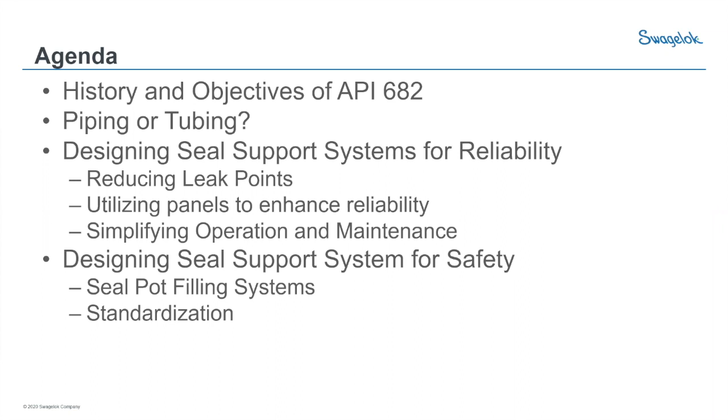Just a little history on API 682. The first edition was in 1994. I want to mention that the nature of these standards is they aren't the leading edge, it's the tried and true. It's everything that's come out and been tested in the field for several years, and then it makes it into that publication after going through the review process.

About every 5 years, with sometimes some delays, they publish a new version of these standards. A good example is the second edition, 2001. Gas seals for pumps were out there for quite some time, as well as dual seals, but they didn't make it into the standard until 2001. So it lags a little behind what some people in the industry are doing, but it's an excellent resource, as it's proven to work in the field, and wherever there are issues, they note that in the standard.

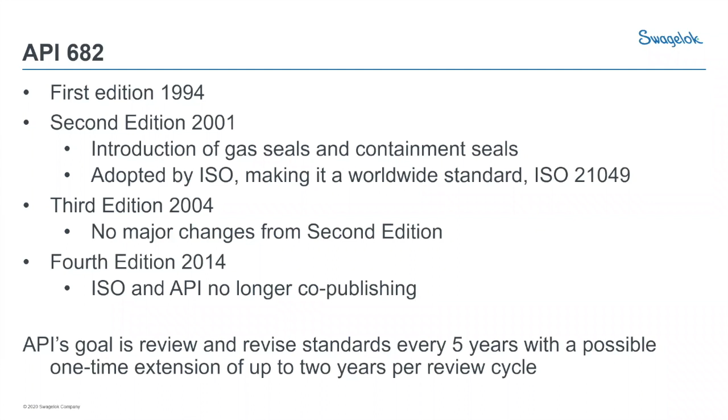The focus of today is the fourth edition of API 682, published in 2014. It's important to first note that it's a standard for sharing best practices, not a code like ASME B31.3. As a designer of systems, it's a great reference, but there are times when you might need to deviate. Throughout the standard, language like 'unless otherwise specified' is very prevalent.

It's really the gold standard. It requires the highest level of quality components, et cetera. So when we have customers in the chemical industry that may have a split between ANSI and API systems, or even chemical plants that are completely ANSI, API 682 is often referenced because it is that gold standard. They might just back down on some of the component requirements because it's not a petroleum service.

The two major sections for seal support systems that I look at are Section 8 and Annex G, so those are the ones I reference the most. Swagelok does not make a mechanical seal, we are not pump manufacturers. There's the EagleBurgmanns of the world, Flowserve, John Crane - those are your seal guys. For questions about seals, continue to work with them.

Where we come into this is being fluid system experts. Swagelok's been designing and building fluid systems for a long time, and over the last 15, 20 years, we've really become quite involved with seal support systems.

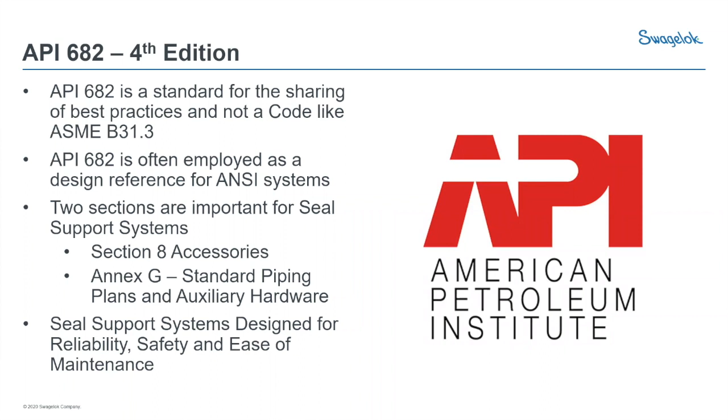So piping or tubing, what do we choose? In the past, for years, piping was the preferred choice. Whenever we look at the standard right now, everything's referred to as a piping plan 53 or piping plan 52.

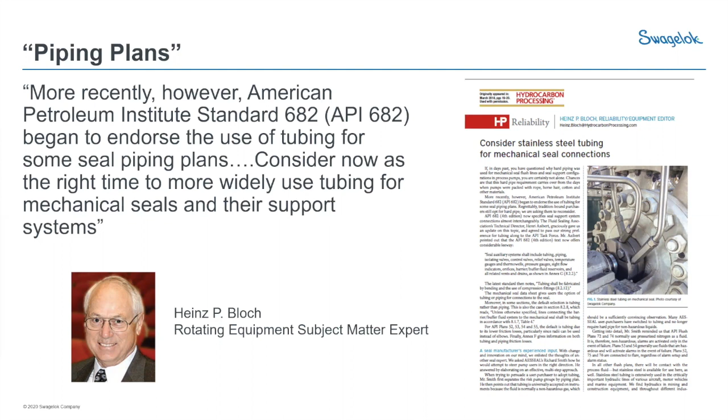I wanted to show an article here from Heinz Bloch, he's basically the Yoda of rotating equipment. He publishes tons of articles in Hydrocarbon Processing. He's an advocate for the use of tubing in these systems, and we've seen that from the major manufacturers of seals and pumps over the last 20 years - tubing has become a much more predominant connection type in these systems, for a variety of reasons that we will discuss.

Typically the pressures are not really a concern—it's really low pressure nitrogen. We also see usage in these systems of tubing above 1 inch, particularly at the OEM level. Companies like Siemens and Dresser-Rand are starting to use tubing above 1 inch up to 2 inch on these systems. But for most of your applications in refining or chemical processing, 1/2 to 1 inch tubing is really going to cover you.

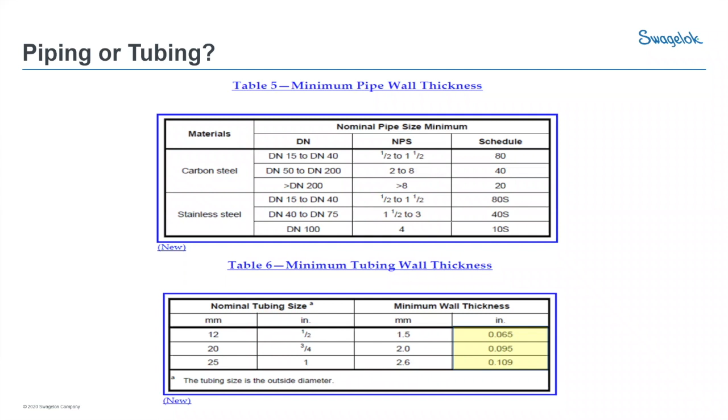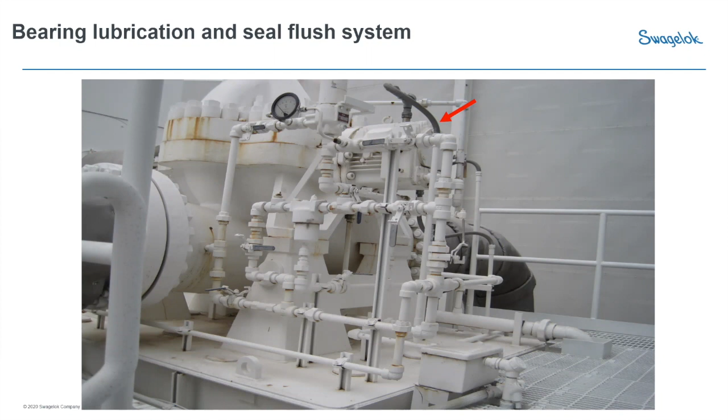One of the other things that was improved, that we worked with the engineering team on, was the vibration issue. These pumps are large and vibrate quite frequently, and the whole pipe system suffered from that. The vibration studies on this pump showed that if you hug the tubing around the center line of the pump, where vibration is lowest, and support it well enough, that whole system now vibrates with the pump instead of sitting off to the side on that pad, separately, like that pipe system.

Overall, the improvements were quite dramatic for the pipeline company, and they've implemented this across the pipeline. Where they were doing maybe 1 or 2 pumps a week, they can now do about 5 or 6 pumps a week when they retrofit these systems and replace them with tubing.

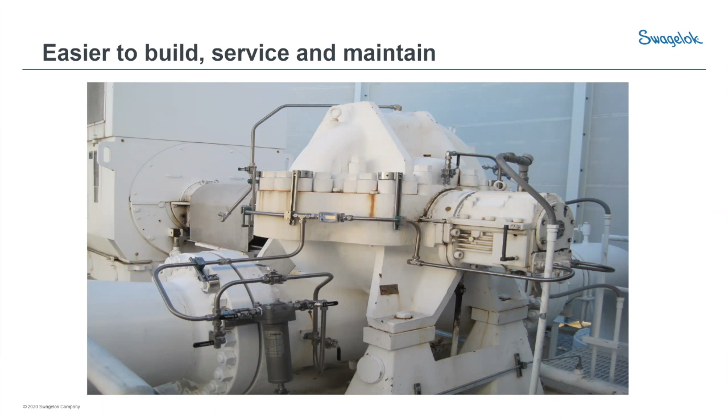I want to make an important note here that, like I said, the standard kind of is a laggard to what people are doing in the field, but they still want to give people pertinent, relevant information on what's being done. What they've done to accommodate that is, wherever something has not been proven to have a 3-year successful life, they note that in the notes beneath the drawing and call it out for each plan. So that's something you should consider when you're designing plans and looking through the book. Not all piping plans are created equal.

For this one, the Plan 12 has not demonstrated a 3-year successful operating life, and that's primarily because there's a strainer in this plan. It can be a reliability concern, because if I'm not doing my preventive maintenance and blowing down that strainer, it can clog, I can lose my flush fluid, and then I've got a seal issue. So it's important to use Annex G to make sure I'm understanding the pros and cons of each installation.

We have customers that will put that strainer in there for a period of time, and if they demonstrate that that strainer is never clogging, it's never getting any grit in it, they remove that component and basically make it a Plan 11 then, just to remove any possibility of an issue.

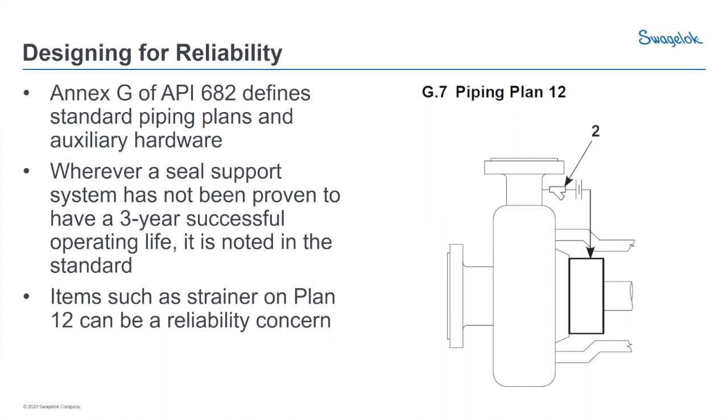One of the big things that all rotating equipment engineers I talked to, I showed you that picture of the pipe system with threads on it, is really trying to get away from threaded connections. And that's throughout the 4th edition of API. There's always mentioning get rid of as many connections as possible, because every single connection on a seal support system is a potential leak point.

However, as I said before, this is a recommendation of best practices. Sometimes you might need to add additional instrumentation. So I think there's a tension for designers when they're looking at seal support systems. They see API and they say, well, this is the way API says I have to do it. But as an owner of this piece of equipment, I think you should also consider there may be times when I need to add something for a period of time to get diagnostic information.

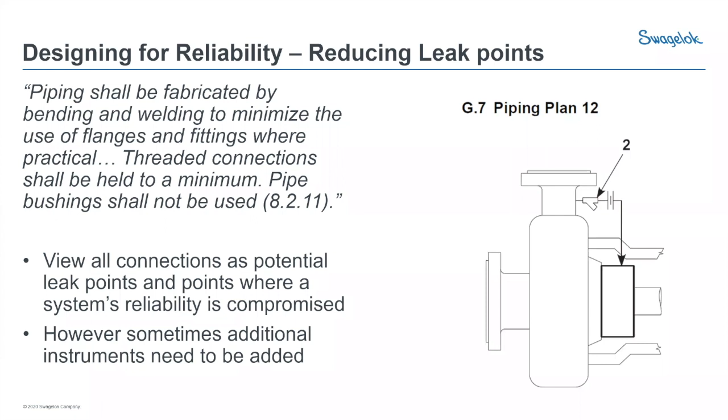So I'll pull up a quick picture here of a modified Plan 12. So I still got my strainer and my orifice in there, but in this instance, now I've added 2 gauges on either side of the strainer, right?

So we've had customers that have had issues with strainers clogging, maybe, and they don't know the frequency. So it's within your purview then to add something like gauges to monitor that strainer and maybe devise a new preventative maintenance schedule after you've had them in for a little bit. It's not that you have to leave those gauges in there forever. Once you come up with a new preventative maintenance schedule and say, okay, that strainer is clogging every 3 months, we're going to PM it every 2 months, you can take the gauges out then and return it to the basic Plan 12.

And I think that's where tubing can give you a little bit of flexibility to easily make those changes and add and remove instrumentation. So I don't look at API as my Bible, but it's a heck of a good place to start and then make informed judgments from there.

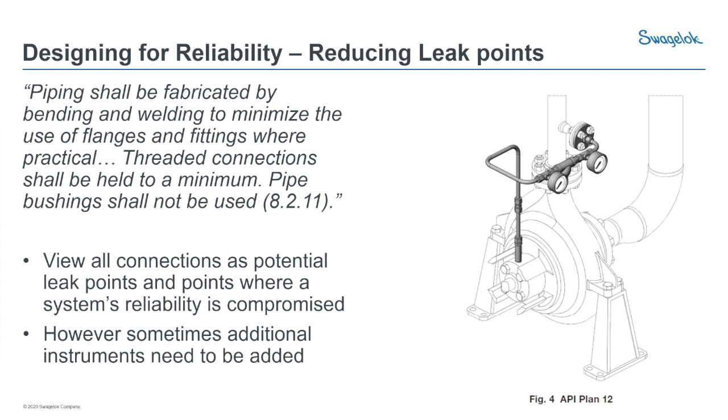So I'm going to give you a couple pictures of installs I see and some of the challenges guys have in rotating equipment. This is a new installation in the fracking fields of southeastern Ohio, where they're fracking and taking natural gas liquids and natural gas out of the ground. So here's a series of pumps, and there's a couple of things I noticed right away.

Here's my orifice plate on a basic Plan 11. It's a Plan 11 with the 52 on there as well. That's the seal pot that you're seeing. Well, they did have some clogging issues on these orifices when they started up the plant. The gas coming out of the field has liquids, it might have some other stuff in it.

But if you can see, as this Plan 11 is oriented, there's not really an easy way for them to add that gauge to figure out if it's clogging - maybe moving that orifice into the middle there and putting gauges on either side of it just to see if they're getting clogging issues, possibly putting a strainer in there for a period of time. Again, I think that's where you can play with the orientation, the components on these things to diagnose problems. Once you've figured it out, revert it back to that Plan 11 and just have the appropriate PM in there.

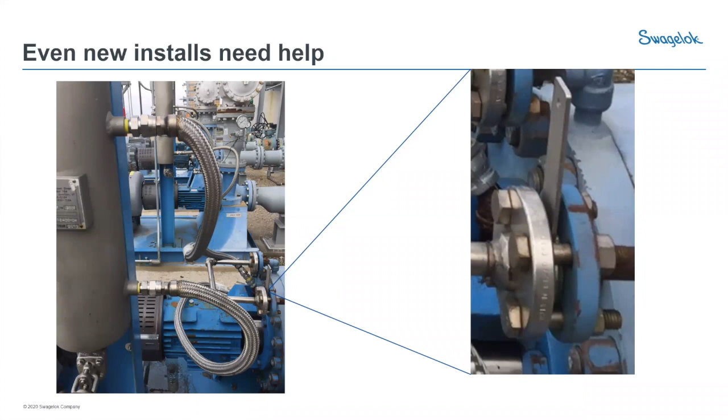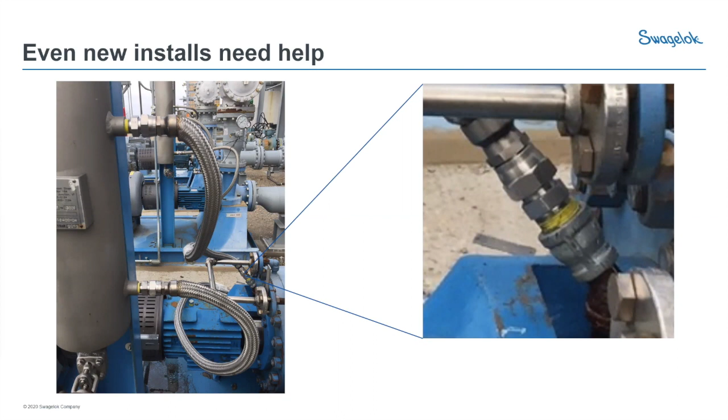Next thing I'm looking at is 1, 2, 3, maybe 4 connections going into my seal there from that Plan 52. Too many leak points. It's too close to the pump. It's just a reliability issue. And so there really isn't a lot of need for us to ever use 3 or 4 fittings to get out of a pump and into the seal pot. It's just something we should not be doing.

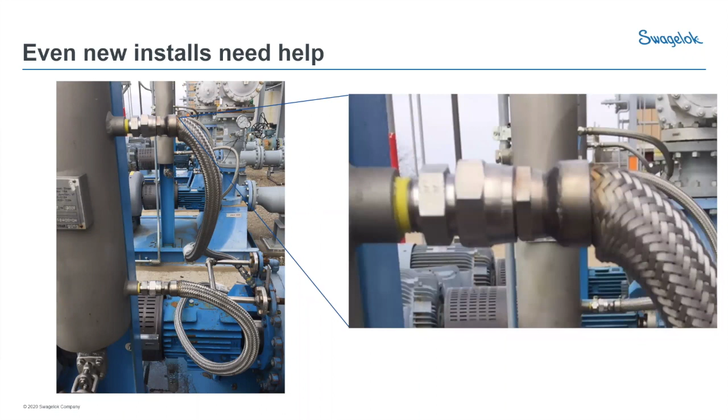And I'm sure the one thing that everybody notices right away, my hose. Hoses really aren't a recommended thing for API service. I would always tell customers - and it's really not even referenced in the standard at all - to always go with tubing wherever possible, because hoses are not permanent installations. They will fail.

I can't tell you when this hose will fail. I can just tell you by looking at it right now, it will fail someday. Maybe it's going to be Christmas Eve or your daughter's birthday. I don't know. Hoses just aren't permanent installations. Let's just not go with something like this.

I won't even comment on the hose laying on top of the pump, or the twisty ties used to hold it up to the gauge in the background, or anything like that. While it might be acceptable for ANSI service, I would never recommend the use of a hose in API service.

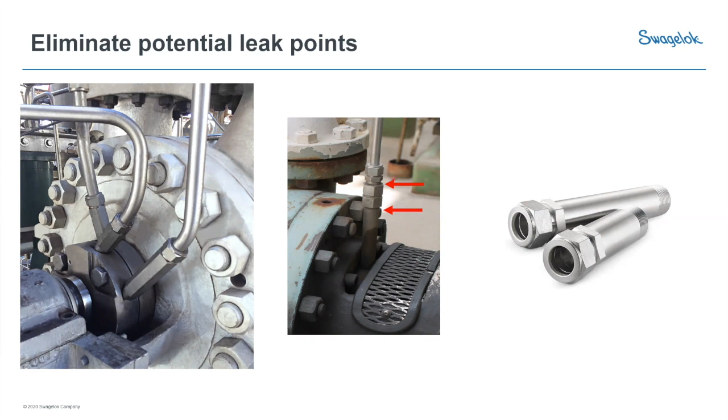Eliminating leak points, I look at temperature measurement quite a bit as well, because I've seen some monstrosities put together to add gauges, or excuse me, thermometers, into these systems. Here's one that's not actually too bulky, but they've gone from 1/2-inch tubing sized up to maybe 1-inch pipe to fit the thermowell and the thermometer in there. That's a costly assembly for somebody to manufacture just to put in a thermometer.

They've got 1, 2, 3, 4, 5 welds on that. That could be somebody's whole morning making something like this. But for me, the bigger concern is that threaded thermowell in the system. If somebody has to change that thermometer because it's failed, and they go out there and accidentally unthread that thermowell, then I've got an uncontrolled release of process fluid — my flush fluid's going to go right all over my installer.

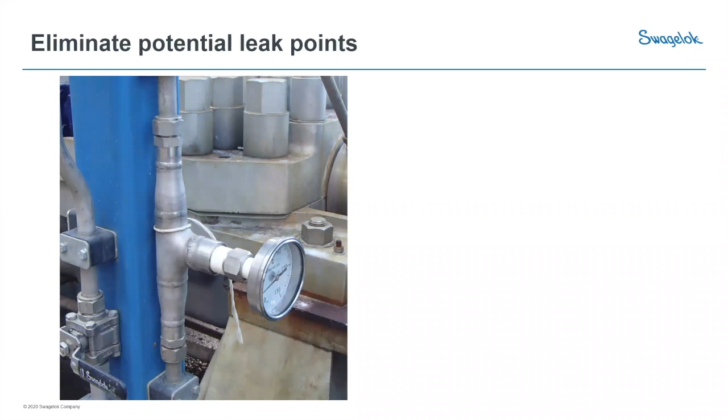So I think there are solutions out there if you're looking to add instrumentation or reduce connections, and we're happy to work with you on those solutions.

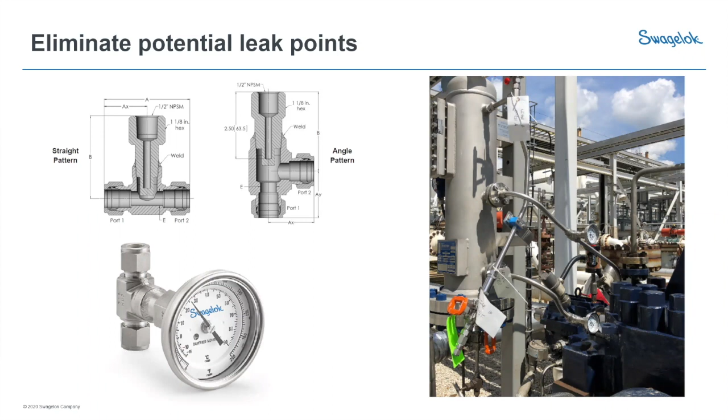Okay, getting back into the standard, designing for reliability — let's talk about what you should be doing with instrumentation in general. A nice thing now is all instruments are recommended to have block and bleed valves on them. While that sounds like a no-brainer, I see many, many pump installations where they have process gauges into a line without any way to isolate that gauge and replace it when it fails.

So you have failed gauges sitting there on suction, or discharge, or a seal system, and now basically if I have any issues with that pump, I'm blind to what's happening in it. Here you can see a between-bearing pump in the picture on the right, with orifices in the bigger fittings on the bottom and little block and bleed gauges leading to my process gauge.

So just remember, I've got to take into consideration how my people are going to maintain this system. Sure, everything works when I put it in the first time — well, it should — but 5 years from now, something's going to happen. How are they going to get out there and quickly change out a gauge, a transmitter, or a strainer? Any of these components just need to be accessible and easily visible.

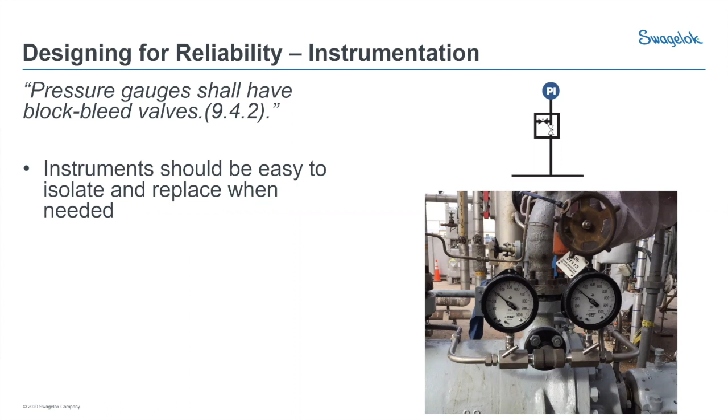Transmitters are definitely the preferred way to go for the 4th edition. It's recommended that everything is a transmitter. In fact, they default to that, and they talk about saying if you can deviate and go to a switch. So on the right there, you see a transmitter.

This is the future, the holy grail for seal companies and owner companies, is to use this information to actually do predictive maintenance, to know, hey, I've got this much time left on my seal based on what I'm reading in my transmitters, the feedback from my seal support system. I don't think everybody's quite there yet. The common thing I hear is that I've got a ton of information, but I don't have the systems right now to be predictive yet.

But hopefully we're working towards that. So on the right you see the transmitter there. We're on a gas plan like a 74 where you're putting nitrogen in the seal. You want to just see what my pressure, my flow is through that to the seal. On the left, we're seeing a plan 76 right there with a switch on it, and that's fine too. Maybe sometimes it's only necessary to have a low pressure alarm, a high level alarm, something that gives you just a basic signal.

But again, I want to look at how accessible and easy to change this stuff is. On the right there, everything's rack mounted on the front. If I need to change my gauge out, I can easily get it off. On the left picture there, I see a threaded gauge into a valve. I'm not sure how I would be able to really change that gauge if needed without taking that entire system offline and taking everything off of that panel.

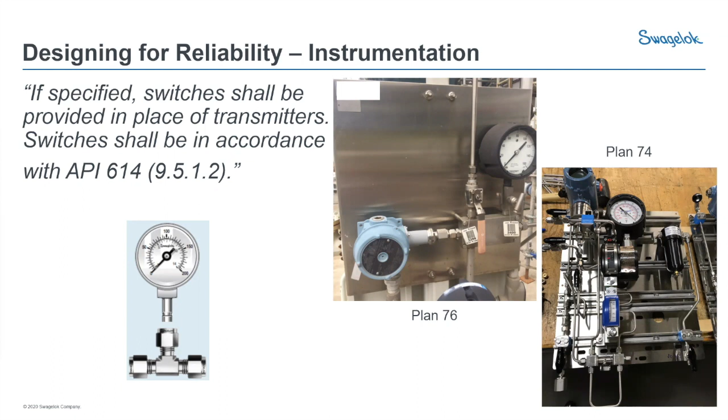All right, additional reliability concerns: vents and drains. Those are critical to include on many, many systems. This one that I'm showing here on the right is the 53B. The accumulators on the back side of my line drawing there, and you can see the lines coming to and from the seal going through that cooler.

While the focus of the 4th edition and the Annex G is on the components actually sitting on that stand, something that absolutely needs to be considered is how are my guys going to hook this up when they're in the field? Do they have a drawing? Do they have a design that shows them that they need to put in those high point vents or those low point drains, or that I want some temperature monitoring on my to and from the seal lines?

If we're just leaving it up to installers and saying, here's a stand with the accumulator and cooler on it, run the lines to and from the seal, we're leaving it open for their interpretation. I've seen plenty of Plan 52s installed where the inlet and the outlet to the seal has been switched, and it's running backwards. Providing the installers with a drawing and the right components to put that in there really makes a lot of sense.

If you eliminate the high point vents from this, you can get a slug of air in your seal, run it dry. You can get some air stuck in your cooler and reduce the efficacy of your cooler. So I really urge everybody to consider, when I have to have my high points, vents and drains on a system, provide an engineer drawing, a picture, and a box of components, or as much as you can give them to make it installed right. Because that first time you start it up, if it's backwards or the air is not bled out of it, you're really going to impact your seal life. So installation is a big reason we get problems with seals, when it's done incorrectly.

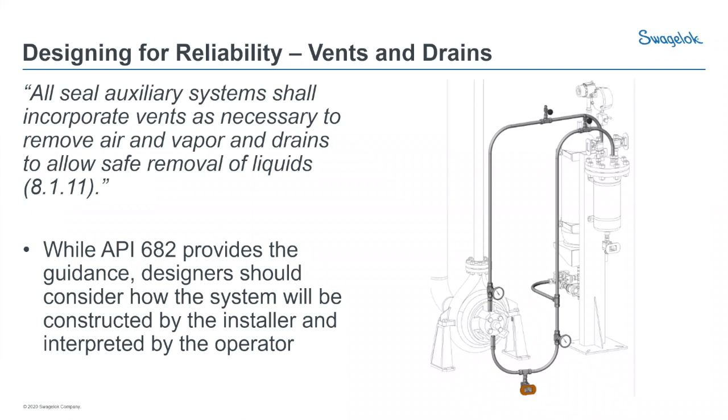All right, designing for safety. So safety is the next big thing. Certainly two major considerations: reliability and safety.

One of the main focuses of the 4th edition is to make sure that when we do seal support systems, everything's located in a range to be easily visible and worked on by the operators. So the picture on the right is an actual image of a Plan 32 as I saw it installed in a refinery. I'll diagram this out for you.

Plan 32 provides an external flush into the seal. My flow came down this hose, which I would typically not want in this situation. It has to do a hard bend, 180 degrees, and go into my Hedland flow indicator, up through my strainer, another hard 90 through my rusty check valve, and then I have a half-cocked ball valve as my flow control.

So while this may technically function as a Plan 32, I don't have pressure indication, I don't have temperature indication. What is the real chance that my operator doing their rounds is going to get down on their hands and knees and look at that Hedland and make sure I'm getting appropriate flow?

What if I have a turnaround and I've got 200-300 contractors on site? Somebody walks up to this and thinks surely that ball valve isn't supposed to be half open, it should be full open or full closed. Well, a ball valve shouldn't be used for flow control - that should be a needle valve. Leaving it ambiguous like this can lead to catastrophic failure, where somebody closes that and you lose flush, or fully opens it and harms the seal.

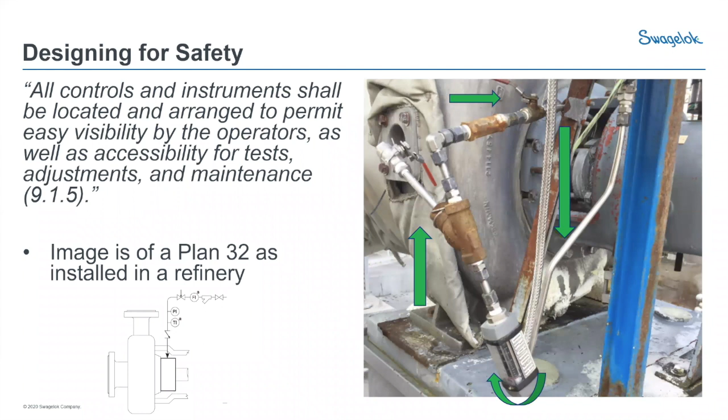I think a solution to that - even though if you look at the ISO diagram at the bottom of the screen, what you're seeing is just components hanging off a piece of pipe or tubing - it's a much better solution to use panels. I'm a big advocate of using panels for any of these systems that we can.

I know systems like a Plan 21 or 23 often are just a cooler and lines running to flush plans, and they're not really conducive to a panel. But is there a space near that pump where we can put some type of information on a panel or a placard? Making all this apparent to operators and maintenance technicians, showing them these are systems and how they operate, increases safety and increases reliability.

So now this is my Plan 32. I've got real clear indication of my flow, a high quality flow meter on there. I can see my temperature, I can see my pressure. It's apparent where the flow is going to the seal from the flush source. It looks like a system. The other picture from before - who knows what that was, right?

So big advocate of using panels or displaying information on or near the pump about what this system does, and where or where not I should be looking for my flow, pressure, and temperature indicators.

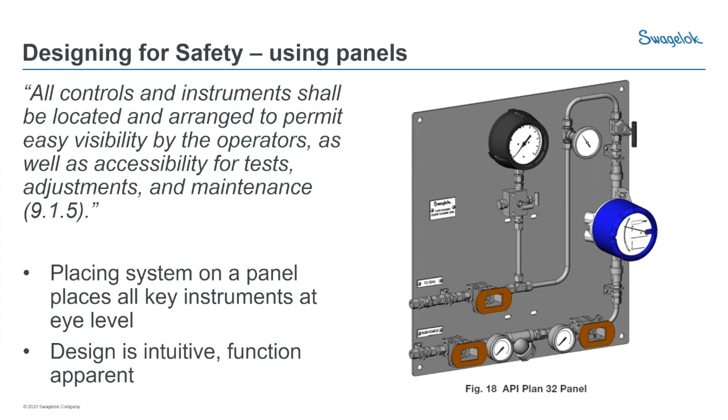Okay, so yes, it's better than nothing that they've done this and written this on the panel, but how do we take this to an extra step? How do we make it safer and more reliable? How do we make this part of the panel? There are solutions out there to do that.

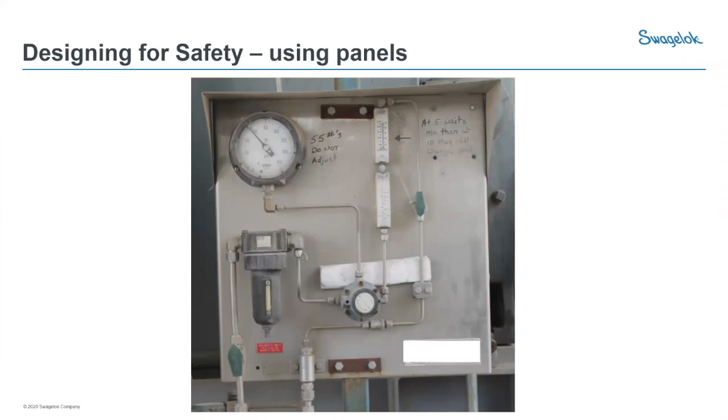Really, the technology today and the availability to do things like a vinyl wrap on the back of the panel - it's amazing the type of information and things you can include on there. The options are really limitless.

These are the vinyl wraps that you see on cars, when it looks like a very fancy paint job with decals and all that stuff. It's the same type of vinyl. It will not fade in the sun - we've done salt spray testing on it. If it gets a little dirty, all you have to do is wipe it off. But then what you can do is put whatever information you want on the back of that panel.

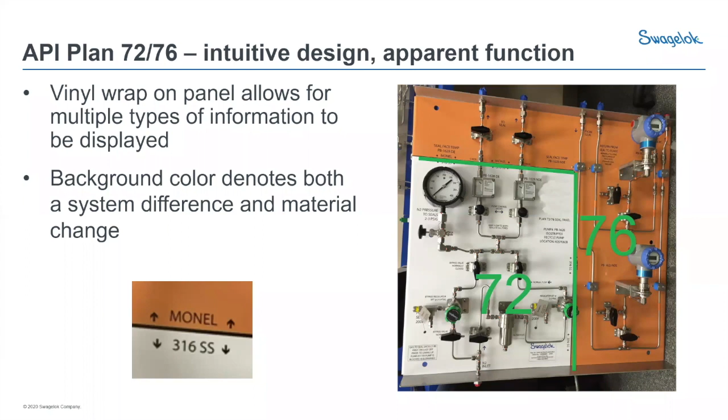So for this one, it's a 7276. We have two different systems there: gas nitrogen to the seal and then leakage collection on the 76 side. So right away I have a color change denoting that I've got two different systems, and it also tells me I've got two different materials there. The 72, clean dry nitrogen, I can go with stainless steel. On an ISO stripper, I could get some acids back on my flare gas, my leakage collection to send to flare, so they want that in Monel. So reliability, safety right away - coming up to the panel, the guy can see two different systems, two different materials.

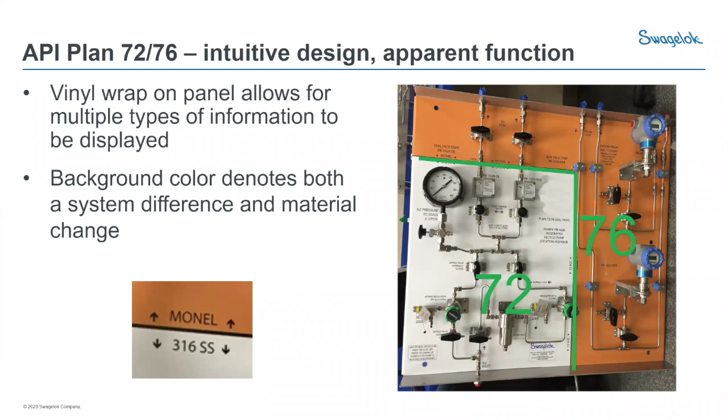What else can we put on the panel? How about at the instrument, the pressure gauge - we see nitrogen in the seal should be 2 to 3 PSI. We also have that same information at the regulator as well. So just as much information as you can put on there.

We have new people entering the industry, new engineers graduating college that don't have the 20, 30 years in the field like some of you guys do. How do we make it easier for a new person to walk up to this, somebody that's not a veteran, and understand how to operate the system or when not to touch it?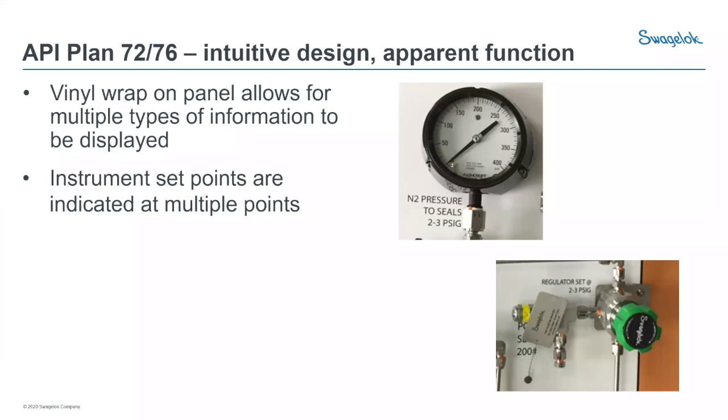All right, what about commissioning and operating instructions? I've got bypass valves labeled, I've got flow control valves labeled, and I'm saying right here, gas to the seal should be first on, last off, prior to lining up the pump or after it's blocked in and drained. Like I said previously, seal failures or premature seal failure often occurs because of improper seal support system delivering either flush fluid or the gas.

And if we don't have good commissioning instructions located on or near the pump, you may not fail the seal on startup, but instead of getting 5 to 6 years out of that seal, or 10, maybe now you're only getting 2 or 3. And you may not even know you've damaged it until later because somebody commissioned the pump improperly. So as much information as we can put on panels, placards, whatever around the pump, I think that's always good. There's a surprising lack of information that I see on many pump systems when I go out in the field. I've visited some customers that are starting to put information cards, placards, commissioning instructions on, and it really does help improve safety for the guys out there working on it and the reliability of the system.

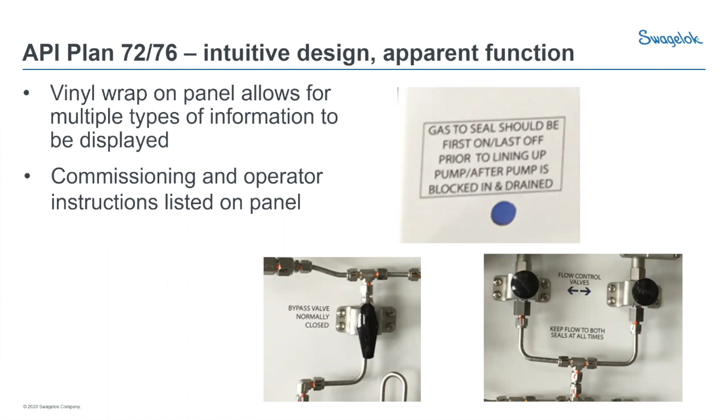All right, one thing I did want to bring up that's an improvement on the 4th edition from API 682 is they no longer want seal pots filled by standing on a ladder. They want everything filled from grade. So I'll indicate here with a little bit of an arrow the way this was filled before. It was an unsafe and inefficient way to fill these seal pots.

You can see up at the top of that seal pot was a pipe plug. So an installer would have to get a ladder, probably had to have either fall protection or a buddy there to hold that ladder while climbing up to the top, unthreading that pipe plug on top of that seal pot. They may have had to shut down or cool down the equipment before doing it if it was extremely hot service. When they did take that pipe plug off, they had health and safety issues because they were exposed to whatever's in that pot.

And on the Plan 52, normal leakage from the seal goes into that pot, and if it's gaseous, it kind of bubbles up through. So just by taking off that plug, you're exposed to maybe process vapors as well. And sometimes it could be pressurized if you had some really bad failures within your seal pot system, or if it was a pressurized system, or it could be very hot. So, not an efficient or safe way to fill these pots by climbing up on a ladder and then using a bucket or a little pump to put it into the top. There's better ways to do it.

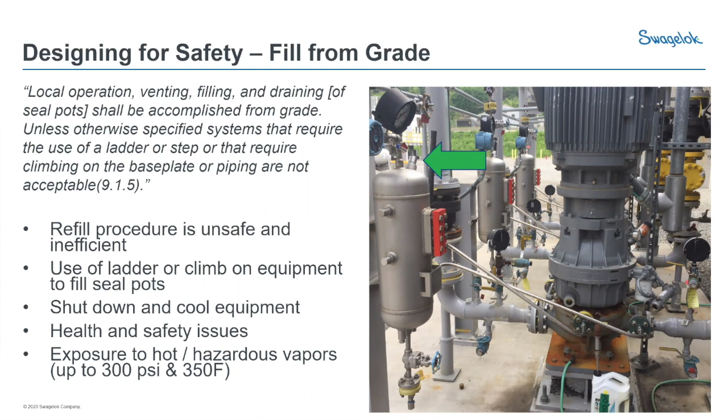So that company decided to start in this different area of the plant, but retrofit all their seal pots with a single design for filling from grade. They tee into the top of the pot with a tubing array coming down to a series of valves that's 1 meter or 3 feet off the ground, so that now my installer is able to take a cart, wheel it up to the bottom, hook into that, and hand pump it up through the tubing into the top of the pot. No longer do you need to take the pot offline or the equipment offline, let it cool down or anything like that. I can refill while it's in service.

Safe operations, no ladders needed. The gauge on this assembly indicates if there was a failure at the check valve at the top, or anything like that, and there would be pressure in the line. Then the guy knows, hey, I can't refill this now, I've got to wait till the equipment can be shut down. There was a failure at the check valve or something's wrong in the system. So there's also safety built into this.

So no exposure to vapors. I'm not tapping into the system at any time where I'm going to have exposure to those vapors.

So this was part of a standardization process that this refinery went through. And the refinery was able to install this same assembly over a period of time across all their seal pots. So from a safety standpoint, no more ladders for sure. But then from a reliability standpoint, they started that process of standardization. And by the time they were complete, they only had to train their mechanics and operators on one way to fill seal pots throughout the entire facility, even though they had a multitude of providers of seal pots and seal systems, different manufacturers.

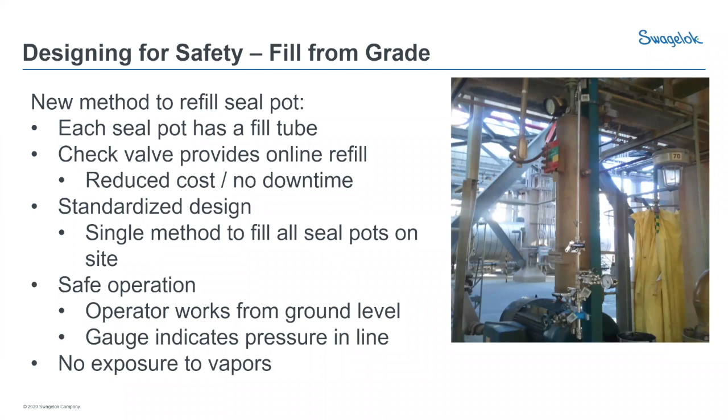The way to fill them all was the same. So when we talk about standardization, I think it's a big topic and it can seem insurmountable, but breaking off little pieces and saying, okay, maybe I can't replace all my seal pots with the same manufacturer's seal pot, but maybe I can make sure they're all filled the same way. So now that's a standard design we incorporate onto all seal pots we provide: that filling arm, that safe fill system to fill from grade.

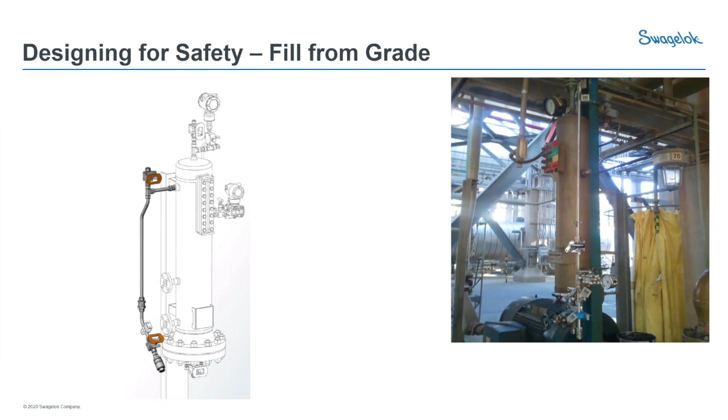So I think I'm about at a half hour talking here. I want to wrap up and say I think tubing does offer some advantages for a seal support system. I think it's overall lower cost, flexible in adding or subtracting instrumentation as needed, but really always make sure we're designing for reliability and safety.

Let's reduce leak points wherever we can, use panels or information posting stations around the pump to enhance reliability, and simplify that operation or maintenance for everybody, because the more steps they have to go through to change something, operate, or maintain the system, the less likely the average person is to do the proper maintenance.

Safety is such a big issue. Seal pots are an easy place to start and comply with that fill-from-grade recommendation in API 682, 4th edition. And certainly standardization pays dividends - maybe not the first time, but as you work through that process, it's a big improvement for safety and reliability.

So with that, I'll take any questions. Anybody have any questions? I don't know about it. I'm not really equipped to ask this question, but I'm going to comment on it.

You had mentioned earlier about a lot of people not being 30-year veterans anymore. Are you seeing more and more of that, the need to almost make this stuff idiot-proof because of the lack of experience we're seeing in the staffing in these organizations?

Chick, I think that's part of the tension within the standard. We really want to always make these systems as idiot-proof as you say, or as robust, with the need for as little intervention as possible. And that's why I say, if you need to add additional instrumentation where it's not shown in API, it might be good to add it for a period of time and then remove it so that you're removing those potential leak points once you've solved or diagnosed that problem.

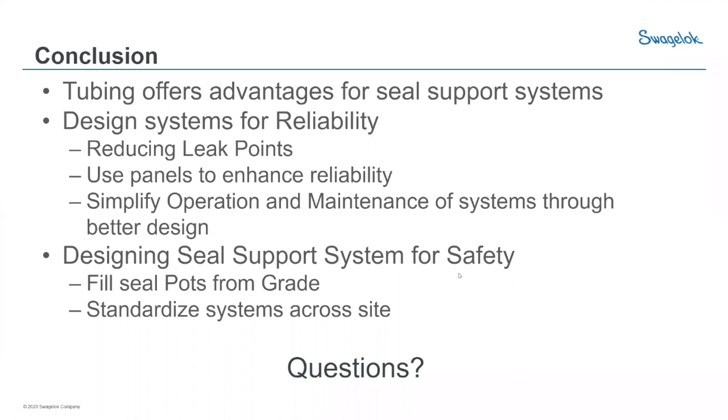Thanks, everybody, really appreciate it for having me here. Thank you, Sean. Thank you, Cody. Talk later, guys. All right. Yeah.